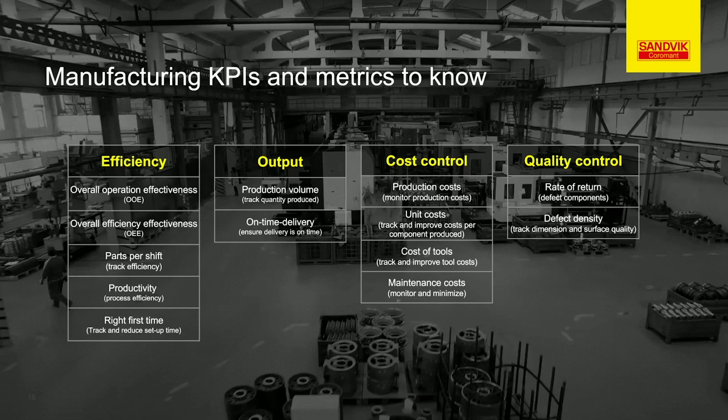Yeah, these are just an example of some of the KPIs that a production unit needs to keep track of. It's about cost, it's about quality, lead times, and so forth. And if you don't manage those KPIs, you're going to have some challenges making sure your company is efficient. But other than these KPIs, it's also about the challenges in the industry, finding skilled people in order to be efficient, all the way from setting up the process to executing the process in the machine shop. And we actually have a slide on that as well.

Yes, exactly. So we're talking 4 main challenges. Yeah, we've picked out a few of the most common ones that we've found from the dialogue with our customers that are a true pain point for them. We're talking about cost, we're talking about quality, as I mentioned before, and then reducing waste.

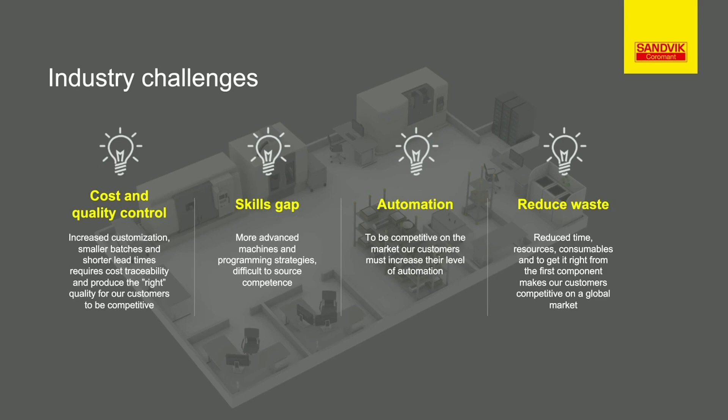There's a lot of waste from the beginning of setting up the processes to finding data, research being done by the engineers setting up the processes, all the way down to the production unit where people are looking for tools. Where are my assemblies? Tracking where is my material for this work order and so forth. And the skills gap, again, is a problem. Finding skilled engineers and technicians to do that job.

But what are companies then doing to remain competitive? When it comes to cost, skills, yes, automation, and so on. Yeah, exactly. And you mentioned one word, and it's a bit of the theme of this dialogue, and it's automation. So driving automation in some key areas will help to get rid of these pain points that we have observed and the industry has.

And I know when I talked about Inside Manufacturing 3, in Inside Manufacturing 2, I mentioned automation, and I said, no, it's not about robots. Yes, exactly. It's a different type of automation that we're going to talk about today. Yes, exactly. If we start at the beginning, we've got the production preparation.

Going back to some of these customers I talked to, just as an example, they get a drawing in of a new job, right? And here, engineers are looking, observing the different features of the component, trying to decide, okay, which machine should I use for this specific material? What process, what operation, what cutting tools, cutting data, all the details, in order to come up with an estimation of time, you know, the lead time, cycle times, and also the production cost. And any error here is going to affect their bottom line, right?

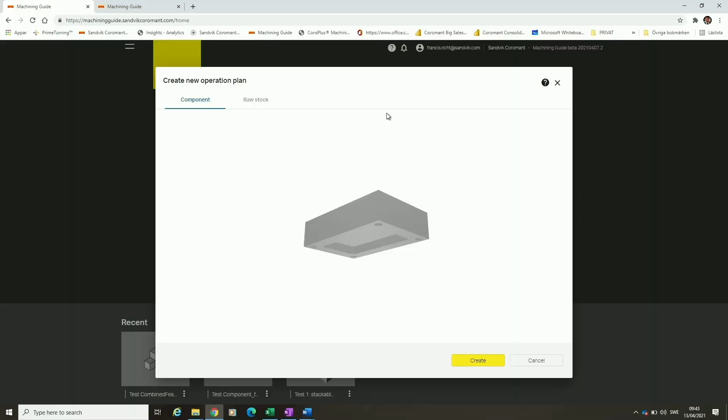It's analyzing the different features of the component, tracking what types of angles, holes, shapes, pockets, dimensions and so forth are in it. So this takes a minute or so. And as we progress here, you can look at the different angles and then also add whatever raw stock I have. It's quite fancy because I can either choose a few millimeters of raw stock, or I can import a 3D model of the raw stock material if it's a casting or forging. Okay, fantastic.

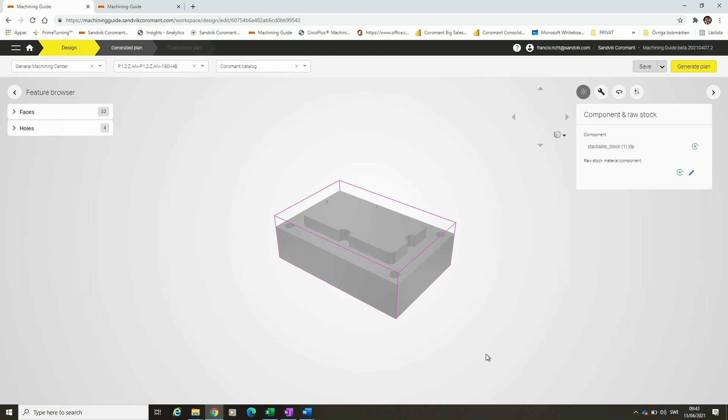Right, so we click create, and now we're looking at 32 faces of this component, and there are 4 holes on this component as well. So now it's identified the different steps, and I can open up and see that I've got everything identified according to the plan.

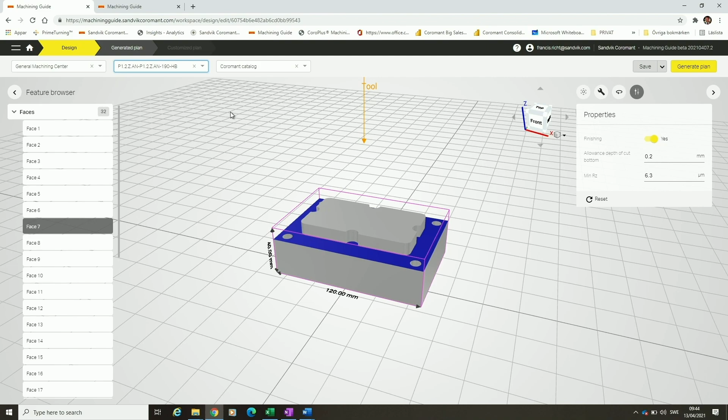What I also can do then, from my machine shop, I can look at what machine do I want to test this component on. So virtually now, I can already select different machines and get an idea of the operation plans and the processes. I can also go in from our library of about 22,000 different materials, industry standard, that I can pick and choose from. And I can also utilize the Sandvik Coromant library of machines and tools, but I can also import my own library of machines and tools.

That I have in my workshop. Exactly. So whatever you have locally, they don't all have to be Sandvik Coromant either. So it's more agnostic, which is great.

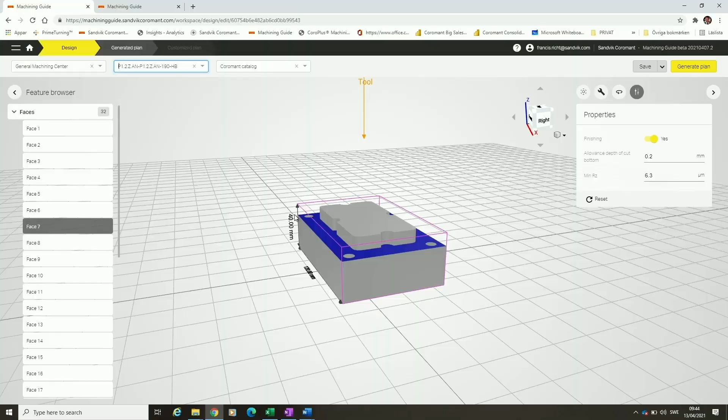Also then, after this has been done, I'm happy with that. I look at some of the features here. I want to do a finishing operation as well at the end. And I can also adjust some of the chip-to-chip time and some of the fixturing time as well. So I can not only get the process and operation plan for the machining, but also get an understanding of the non-cutting time parameters, which is really important to get an overview of the operation plan itself.

So here now we're clicking on starting the planner. Again, as you say, this is a cloud-based solution. It's a beta version out there, so this takes a bit of time. So what we'll do is we will just jump into one that has been done before on this component.

And while you're jumping around, might be a silly question, but cloud-based, is that really safe? Yes, it is. And again, we'll come back to that topic a little bit more with one of our coming partners, but we have ensured that the data uploaded here and utilized is not of any risk of contamination because of the data security principles we have in the company, and the partners we have securing that data. That's great.

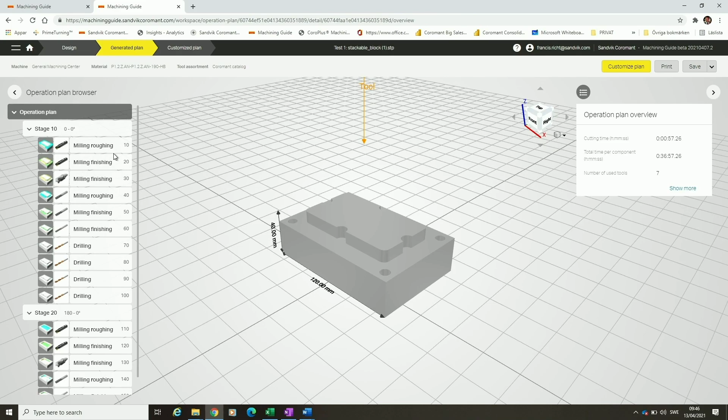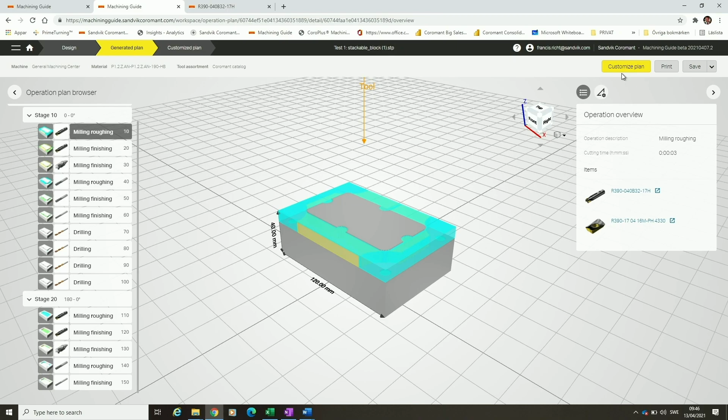So coming back to the demo, now you can see on the left-hand side here the various operation plans, selected tools for this job, and you can click, as an example, on a tool, and it visualizes what feature on the component we're machining, what tool has been selected in detail. I can also click on that tool, and I will be automatically transferred over to the tool area on the web as well. So I can see exactly what the tool is, and add it to my cart for later purchases.

And then, quite interesting, if I'm sitting there with experience from the last job, I can customize this plan manually, go in and switch, okay, I want to do this a little bit different, depending on what my machine shop looks like. If I come up with different timings and maybe utilize different tools, I can put that in. You can always go in and adjust the cutting time, speed parameters, feed parameters, and so forth.

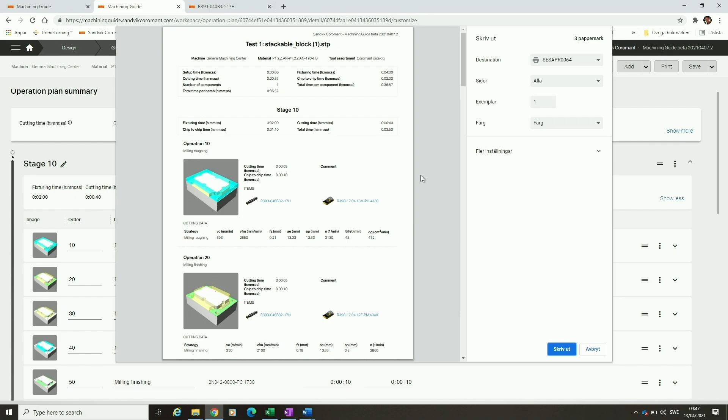And then at the end of it, I can print out and save a documentation of the operation plan I have selected, because I will be given different operation plans. I can select 1, 2, or sometimes 3 different operation plans with different machining strategies. So when I'm happy with the one I picked, I will get information about the machining time for the overall component. And populating machining cost, I will also get what it would cost to manufacture this.

So this is a great asset for minimizing all that preparation that engineers and technicians are spending their time on, assessing how long it's going to take, what's it going to cost, and what operations, tools and cutting data should I use for quoting new jobs, or when I'm doing the programming in my CAM software. This is a great help. So it's really a time saver. It is. It's unique on the market, and it really takes another step at automation.

And when you say print everything, of course you can save it as a PDF, because in our production we're paperless. Of course. So you're saving this, and you can send it to maybe your customer: this is how we're looking at the job at hand, this is the cost, this is how long it's going to take, depending on quantity of components. And again, I can use this as input to the CAM programming step, which usually comes after this.

This sounds absolutely fantastic. Okay. And I mean, it is a beta version, obviously. Yes. But if I would be interested in getting on board, how can I do it?

Yeah, the best thing is just visit sandvikcoromant.com. You can look for our digital solutions there and machining guide and sign up for a beta version right now. Test it out, see what you think, and also give us feedback. And then when we're releasing it, which will be decided quite soon, it will be there for signing up for a subscription. Fantastic. It sounds really, really helpful.

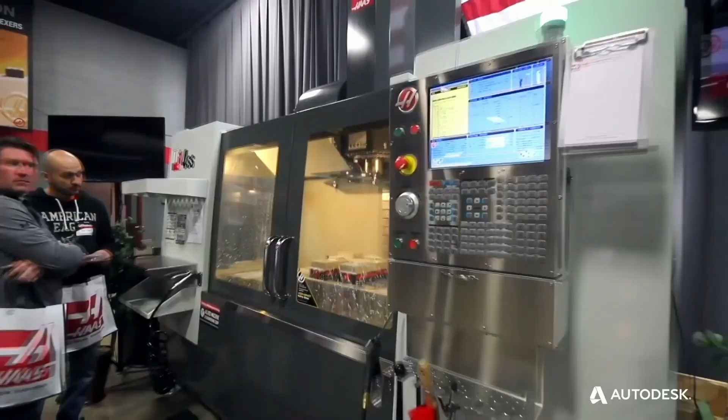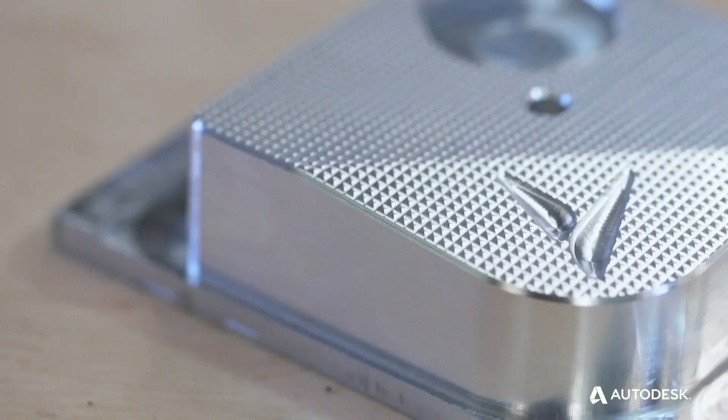Most design and manufacturing companies are struggling with tools that don't work together. The problem happens as each vendor is trying to solve one problem in a long chain of events and can't connect with others' data. That is, until now. Companies can manage, connect, and push 3D design data to the cloud, letting all the teams see the latest version and collaborate on next steps.

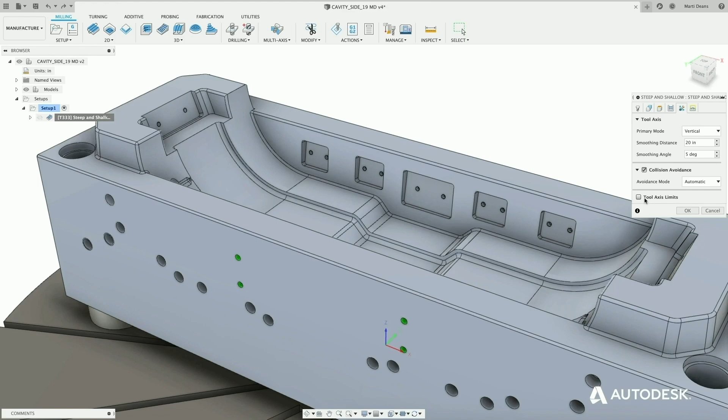There was a time where manufacturing meant dirty and hard-working labor. Today, even mom and pop shops have access to the latest high-tech equipment. With Fusion 360, we make it easier to program these complex machines and adding automation by letting the machine check and validate its own work. We are connecting manufacturing in ways never seen before.

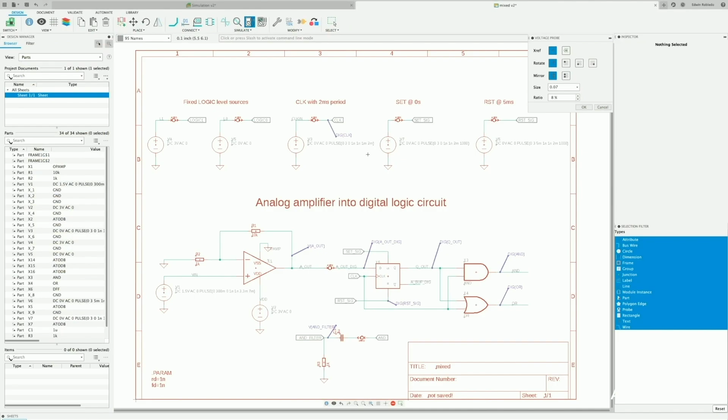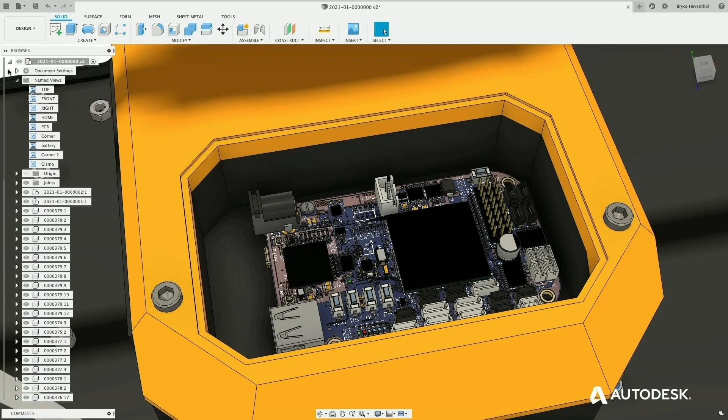As our world is getting more connected, the tools we are using every day will be smarter. Bringing electronics into the design tool is new. Having it all in one place will help the entire design team. When the part design changes, your electronics also need to reflect those changes. There is a theme. Working in a connected environment has all the benefits versus a disconnected work process. But what about next week, next month, or next year?

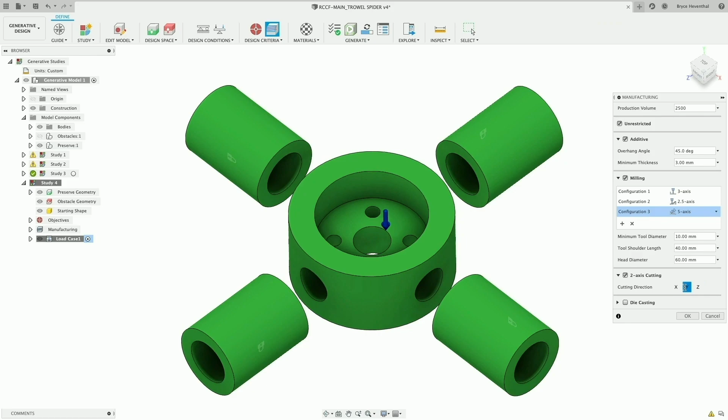We are well into utilizing cloud computing today. We are already automating the design process. It is not difficult to have a computer design a futuristic flux capacitor, but at Autodesk, we are taking it one step further. Combining cloud computing and our leading knowledge of manufacturing with generative design, we are letting the cloud explore designs that manufacturing companies can make today, next week, and into the future.

The value of a connected workflow has to be obvious. As companies are getting ready to make significant investment in upgrading, they will be looking for a solution that can take them through the design and manufacturing cycle in one continuous flow.

Okay, it's getting more and more clear to me what this is all about, the connected workshop. It's about seamless integration, it's about tools, it's about data, it's about getting all the bits and pieces together. Exactly. Understanding more than just making chips. Yes, exactly. So this was the preparation part, and now we're getting closer into the machining.

And there as well, data from the source is key to have. If you have the data at your fingertips, it's much easier to make decisions, to start automating some of the machining sequences as well. And here we are picking up data from the cutting tools, sensors embedded in the cutting tools. Directly in the machine. Yes, exactly. And then process monitoring and process control is another way of understanding what's really happening from chip forming. If you're getting chip hammering problems, tool wear indications, vibrations, surface quality, and all that.

What about one thing? We have some issues sometimes with crashes. Do we have a crash detection? We do. We have an offer looking at collision detection. This is really valuable when you're setting up different jobs again, right? Yes. If you program something incorrectly, instead of damaging the machine or component or tool, this will stop the machine within milliseconds.

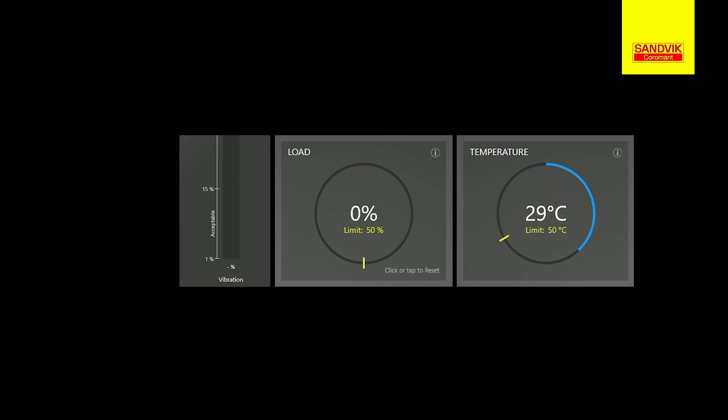Welcome to a demonstration of SilentTools Plus machine integrated functionality. We will demonstrate setting and reacting on load limits using the CoroPlus connected machine interface. The system can automatically connect to the tool when it is selected for use and disconnect when it is finished. With SilentTools Plus machine integrated, you have the possibility to specify load, vibration and temperature limits. The limits can be set and updated anytime, either manually or pre-programmed in the NC code. This gives you the possibility to easily set specific limits for different components and stages in the machining process.

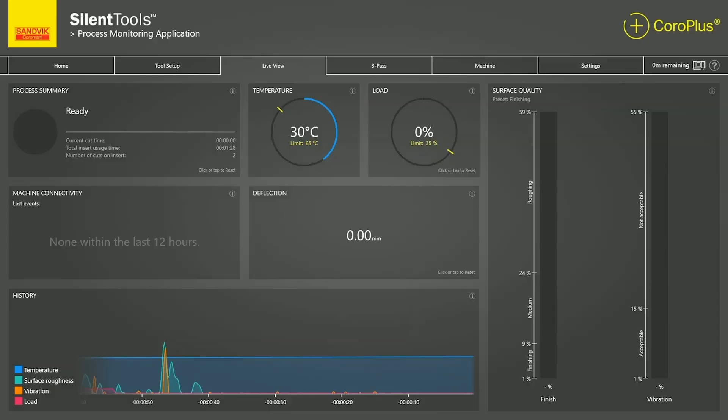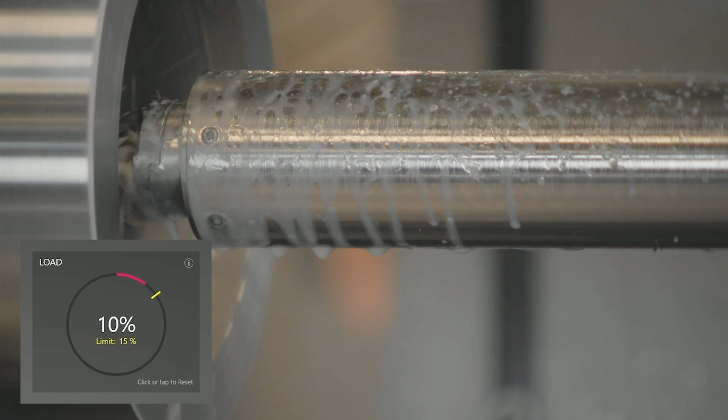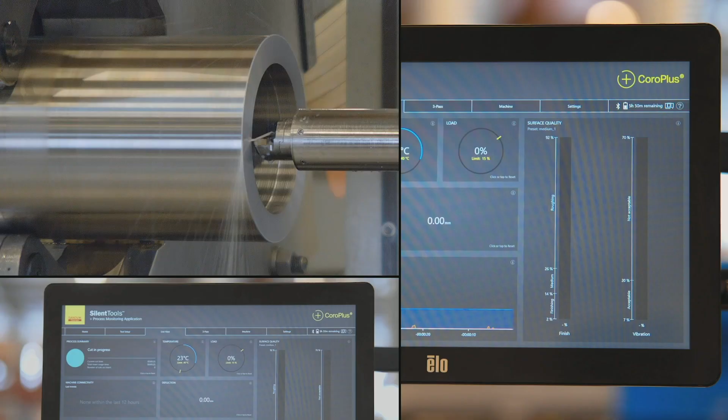For this demonstration, the load is set from the NC code. The limit on the load tile is updated and the machine event log records a new entry to reflect the event. The SilentTools Plus software will actively monitor the load while machining. If the load exceeds the specified limit, it immediately sends a load outside limit message to the machine. The corresponding reaction by the machine is fully customizable. Here, it's programmed to stop the process and quickly retract. In this last part of the demonstration, you can see the sequence of steps in real time. The machine response is customized to just retract a short distance and stop the process.

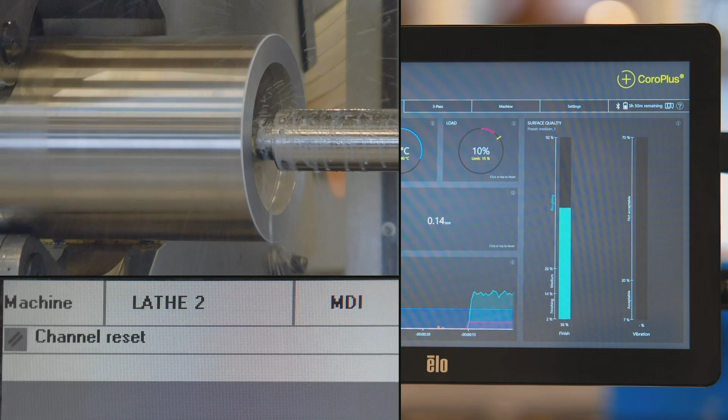That was impressive from Trondheim, Norway. And cutting tools and machining tools working autonomously, that's really, really impressive. It is. Yeah. And coming back to where we all started our discussion a while ago, there are lots of things that actually can be done. Connecting things. Exactly. Working behind the scenes with automation.

Yes, exactly. So maybe we should go back to the beginning of where we started this discussion and some of the examples from our customers that I visited a year ago, and you know the pain points there. So it's really important to again collect data from the machine tool, from the cutting tools that we saw here, process monitoring, to build up as real a picture as possible of the machining processes, understanding your downtime, overall efficiency rates, cycle times, but also if I had any problems like broken tools, tool wear, that red light again, what and why does it happen?

Is there a risk that I actually can collect too much data? I wouldn't say so. Again, a cloud-based solution makes sure that we're collecting data, we're managing that in order to take decisions, helping operators understand what's happening, the technicians, the engineers, even the service technicians, what has happened and why. But again, coming back to data storage and security. And the cloud. And the cloud, exactly. That needs to be safe. Yeah. And for that reason, we're working very closely with our partner Microsoft in order to ensure data storage, data security, and much more functionality.

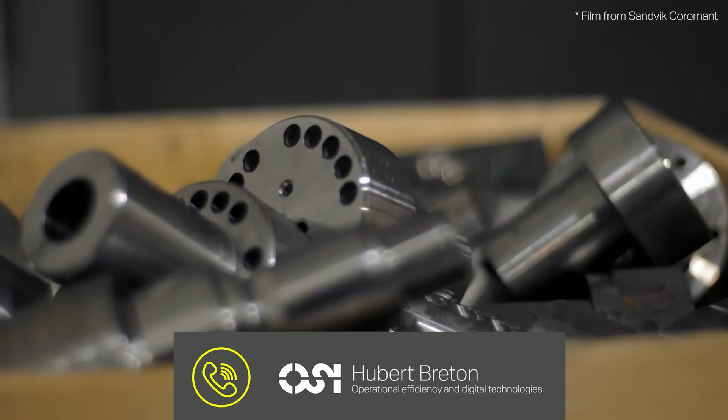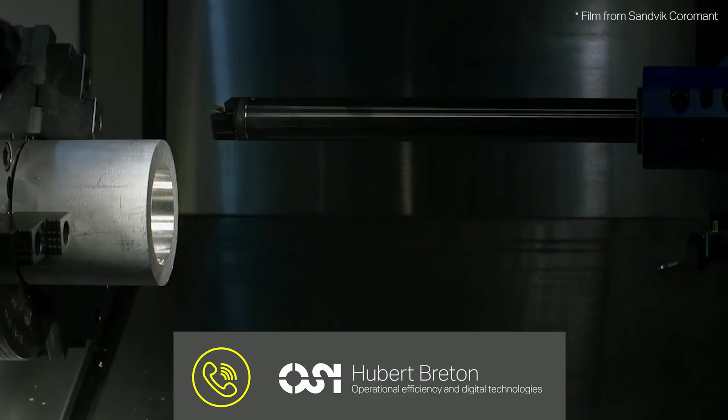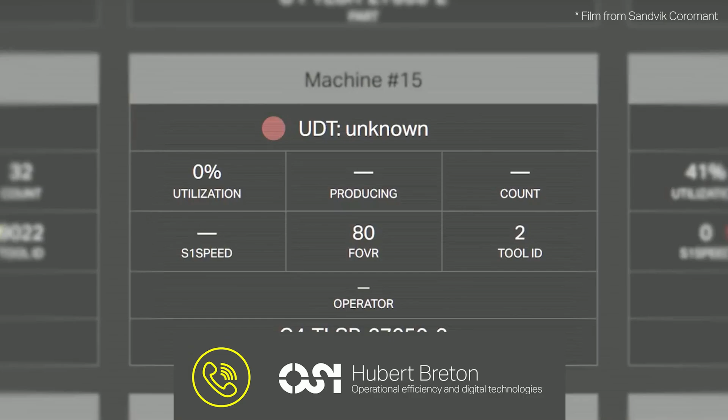What we do is we have a machine shop, and we also make woodworking equipment. We didn't know what our OEE was. That was a big thing. We had no visibility on stoppage causes in the plant. It was hard to precisely evaluate job runtime and delivery dates because of that. And finally, we didn't have any data to fuel our efficiency improvement efforts. The first thing is, if you start data collection early, you'll get that history early, and then you can go back later to that data. Also, without data, it is difficult to start any continuous improvement efforts. For us, data analysis is the starting point, really. Otherwise, everything is based on feeling, and it's all very subjective.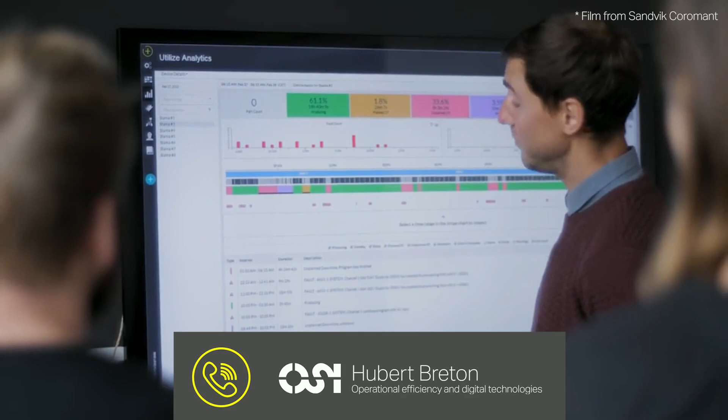The recording of machine signals and stoppage causes for each of our work cells will help us make targeted improvements short term. That being said, with the advance of new technologies such as AI and automation, we firmly believe that data-driven companies are setting themselves up for success in the future as well. We think Sandvik Machining Insights will be an enabler for other technologies down the road. Thank you very much, Hubert, for sharing your thoughts on that.